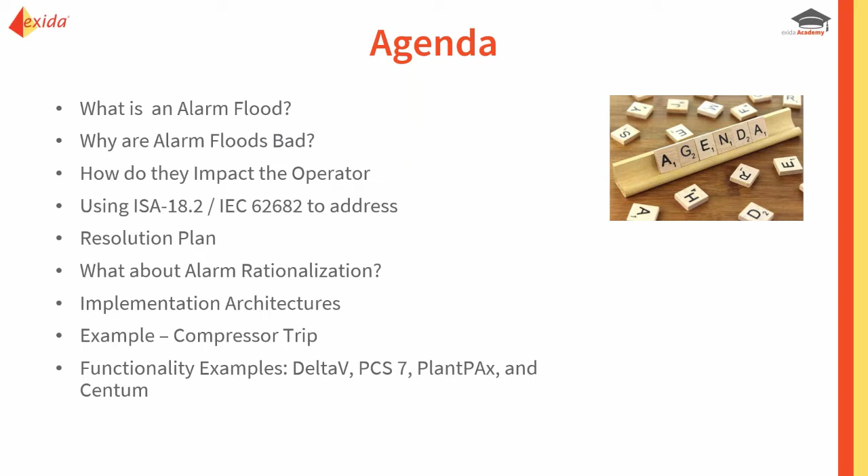In terms of the agenda, we're going to look at alarm floods. What is an alarm flood, and what does it mean when it happens? What does it do to the operator, how does it impact the operator, what can happen? We'll also look at how you recognize floods, how you quantify and measure them, determine what's happened, and figure out how to fix it. We'll look at the information and requirements provided in the various standards and guidelines that exist, and talk about how alarm rationalization figures into minimizing alarm floods. We'll look at different architectures for implementation, whether in the controller itself or on a supervisory computer, and also look at an actual example, a Compressor Trip application, where the compressor trips and you end up with a flood of alarms. We'll look at examples of how that could be implemented within different control systems, including Emerson DeltaV, Siemens PCS 7, Rockwell PlantPAx, and Yokogawa's Centum platform.

So let's start with the definition of what an alarm flood is, or a concept about what it is. A question: is an alarm flood a condition during which the alarm rate is greater than the operator can effectively manage? Is it when the operator gets more than 10 alarms in 10 minutes? Is it a situation usually triggered by a single event, such as a plant upset? Or is it one of the most complex alarm management problems to solve? The answer is all of the above.

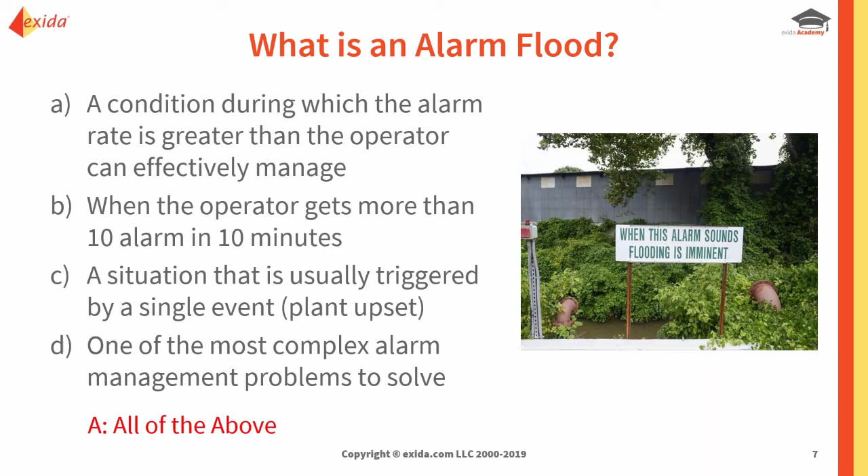According to the ISA 18.2 standard and the EEMUA 191 guideline, an alarm flood is when the operator gets more than 10 alarms in 10 minutes. Now, how do we know when you are actually being the victim of alarm floods and when it's actually happening to your operators? You would notice it because what they'll be doing is furiously acknowledging the alarms or banging on the silence horn button to be able to concentrate and process what's happening. So you end up with a lot of alarms coming in that the operator needs to get through as quickly as possible.

In a lot of cases, operators are just acknowledging the alarm without really understanding what it's for and what it means. Part of the challenge they face is they need to make a quick judgment call about whether the alarm is important, and if it is, what do they do about it? Some of the alarms often are not useful in that case.

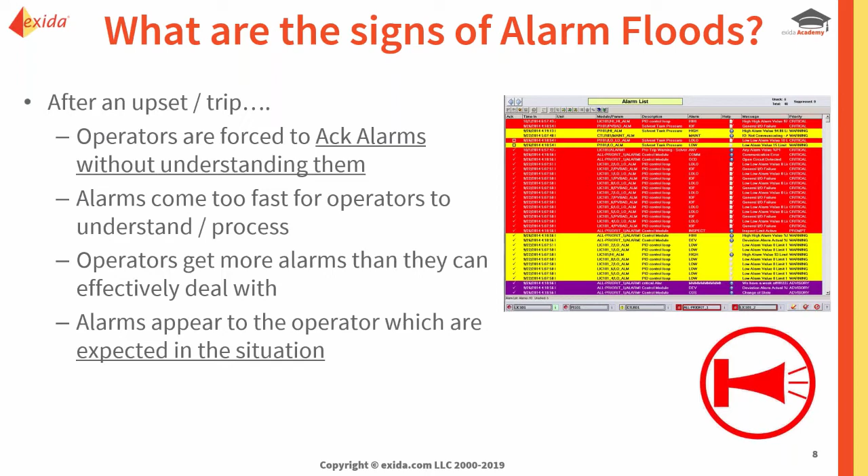After a piece of equipment trips, there are a certain set of alarms that you would expect to get. Those are not very useful at that point in time, but the operator has to sort through all of that stuff and try and make sense of it. That's why alarm floods can be so challenging.

Alarm floods typically occur during the most stressful times: startup, shutdown, initiation of upsets, and that leads to significant additional stress on the operator. It can overwhelm them. The sheer number of alarms can overwhelm them, and the stress caused by that can make it more difficult for the operator to respond effectively.

If we look at this layer protection schematic with different barriers in place to prevent the hazard from escalating, one of the very first ones, in yellow, is the alarm and operator response to the alarm. Well, we need that to work. We're counting on that to work with a pretty high reliability for safety purposes.

For a typical alarm that one might take credit for in a basic process control system, we would assume a risk reduction level of 10, which means a probability of success of 90%, or a probability of failure of 10%. That's the case for a nominal alarm that we're taking credit for.

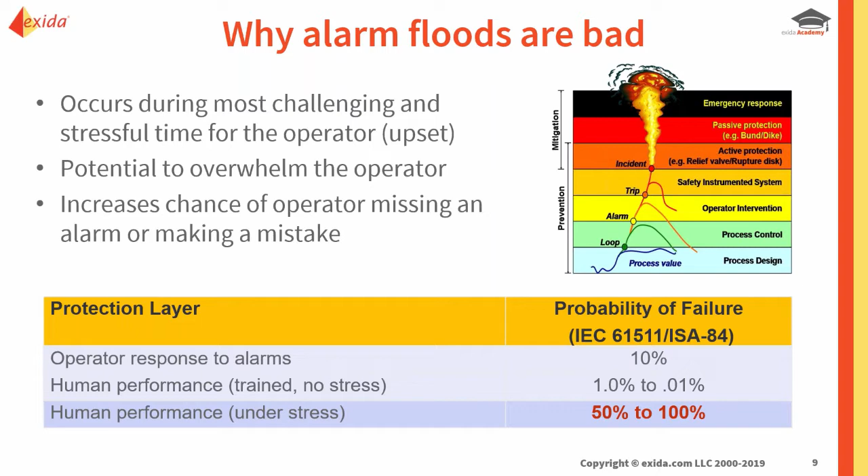But look at this table here, how the operator's performance, meaning how likely they are to fail, changes when they are put under stress. They go from a less than 1% probability of failure to potentially 50 to 100% probability of failure. That would mean this alarm, this layer of protection we're counting on to prevent escalation of the hazard, is very likely to fail if the operator is being flooded by alarms. That's one of the serious ramifications of alarm floods.

This was emphasized in an incident that occurred in 1994 in the UK at the Milford Haven Refinery. The refinery was hit by lightning during the summer, and that started some fires within the equipment of the plant. They shut down most of the operating units, but kept the cat cracker running.

As they were trying to keep it up and running, some of the vessels overflowed. Relief valves went off multiple times, relieving to a knockout drum that became more full of liquid than it was designed for, and that resulted in a rupture of an elbow and a discharge of hydrocarbons that then exploded and caused more fires. When they investigated to find out what happened, there were multiple problems, including poor HMI design and some issues with that.

One of the things they found was there was actually an alarm that said high level in the knockout drum. So the alarm was presented to the operator to tell them something was critically wrong and needed their response. The problem was it was one alarm in 275 coming in a period of 11 minutes. That's like a new alarm every 2 to 3 seconds.

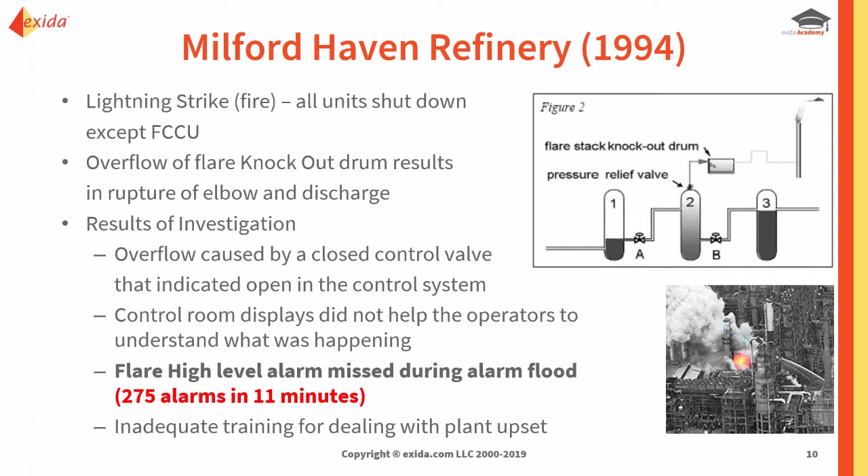If you can just imagine that, put yourself in the shoes of the operator, you can see why that was so challenging. So the HSE in the UK did a very thorough investigation. There were reports published with lessons learned.

Specific research was then gone into collecting best practices for alarm management, which we'll talk about in a second. But some key takeaways from their investigation: alarms should be limited in number to that which an operator can effectively manage or monitor.

We can't just overload the operator with alarms during a flood and expect them to be able to respond correctly. Second, safety critical alarms, like the high level in that knockout drum, need to be distinguishable from other operational alarms. What happened in the Milford Haven incident was alarms were all set to the same priority. Every one of those 275 alarms had the same priority, so it was very difficult for the operator to notice that critical knockout drum high level because it didn't stand out from the other alarms.

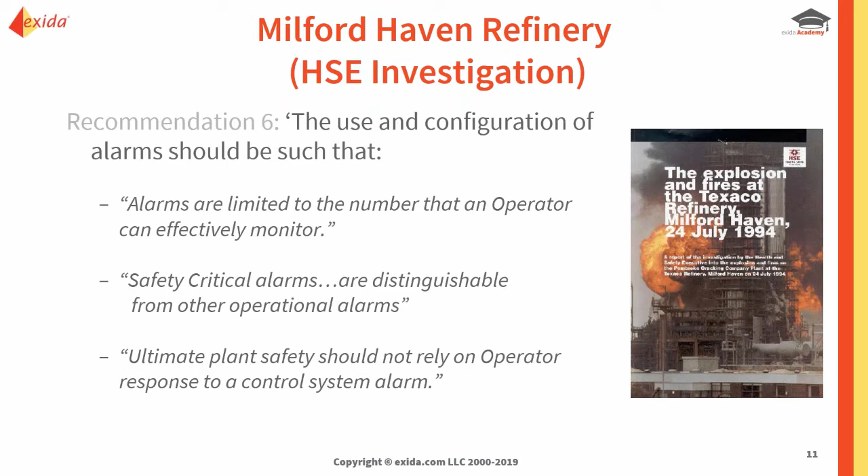So those are key takeaways from that incident that we carry forward in alarm management practices. As a result, the UK launched research and codifying of best practices, and that came into publication with the release of the EEMUA 191 guideline, which first came out in 1999.

It was a collection of best practices for alarm management, and it was the best body of knowledge related to alarm management until the ISA 18.2 standard came out in 2009. That's a true standard with requirements and recommendations related to what owners, end users, and integrators need to do. Now that was updated in 2016, and it was actually used as the basis to create an international standard.

IEC 62682. So those standards now exist to drive alarm management practices. For ISA 18.2, after the standard first came out in 2009, the committee turned their focus to creating technical reports, which went into more detail about how to implement the requirements in the standard. There's one technical report in particular I wanted to highlight: technical report number 4, on advanced alarming. It covers some of the suppression and alarm flood scenarios that we're going to talk about today.

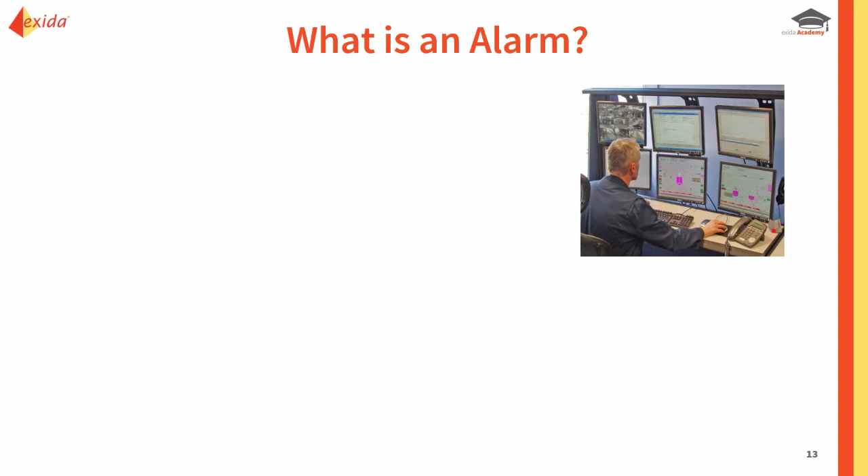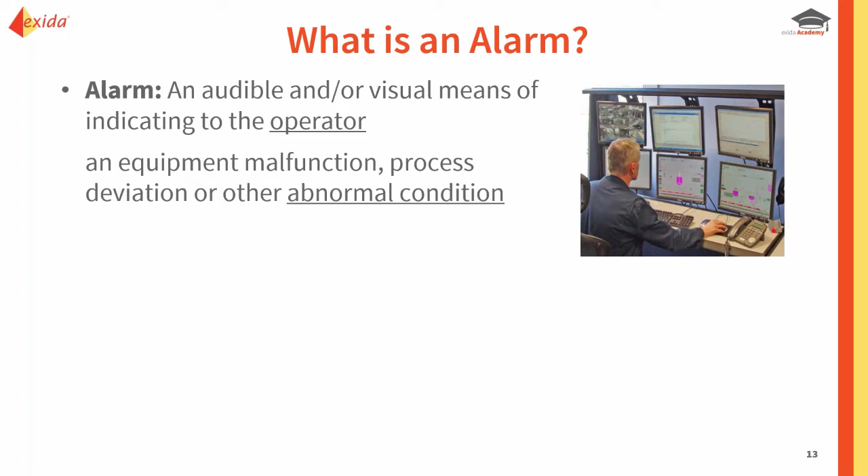First, let's back up to some basics of what an alarm is, according to the definition in those standards. An alarm is supposed to be an audible and/or visual means of indicating to the operator - and I underline the word operator because they are the target audience of the system - if the information is not understandable and actionable by the operator, then it doesn't belong in the alarm system. Second, the alarm needs to indicate an equipment malfunction, process deviation, or abnormal condition, meaning something is wrong, something unexpected has happened. Last but not least, it requires a timely response other than acknowledging the alarm - we're talking about opening a valve, turning on a backup pump. So this is the criteria for what makes a valid alarm.

The process of alarm rationalization then is reviewing the alarms that exist in your current system, or the alarms you are proposing to put in, and making sure that they meet this definition of an alarm. This is important because we're going to talk about whether rationalization occurs before we think about doing suppression, or whether it occurs at the same time. And you'll see what the recommendation is.

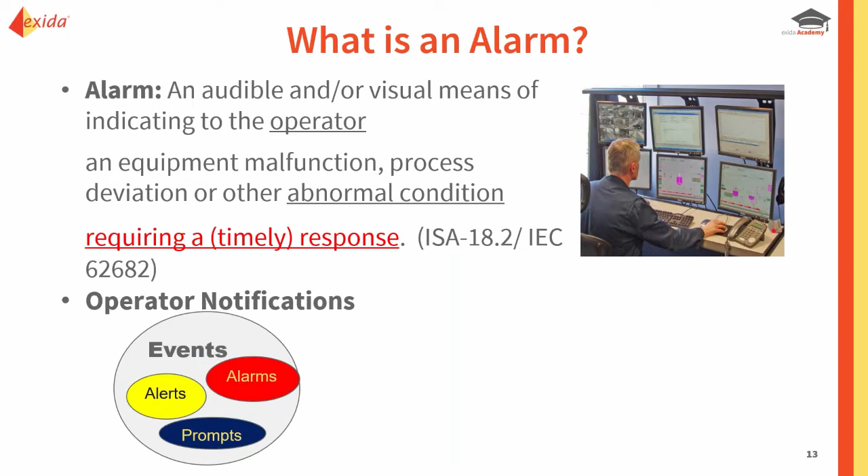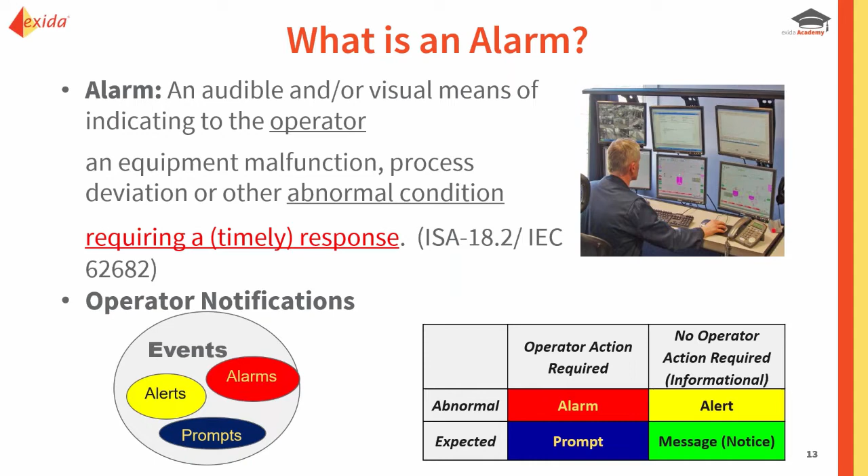Now, one of the reasons why folks have alarm overloads during steady state operations is because they are using the alarm system to notify the operator of everything, even if it's not truly an alarm. So part of the way to clean up the alarm system via rationalization is to eliminate those points that don't meet the definition of an alarm, and to recategorize some of them as this alternate form of notification that they might truly be, and then get that out of the alarm summary display.

Some of the other key design principles we will leverage: making sure that every alarm presented to the operator is useful, relevant, and unique. So we're going to talk about doing alarm rationalization first to eliminate nuisance alarms, get rid of alarms that don't belong. Then, part of what happens during alarm floods is you get alarms that are useful unto themselves, that do serve a purpose, but when that particular event occurs, the alarm is no longer useful or relevant to the operator. So rather than present it to them, rather than give them misleading or useless information, we want to come up with a better way - present them only the information they need to know.

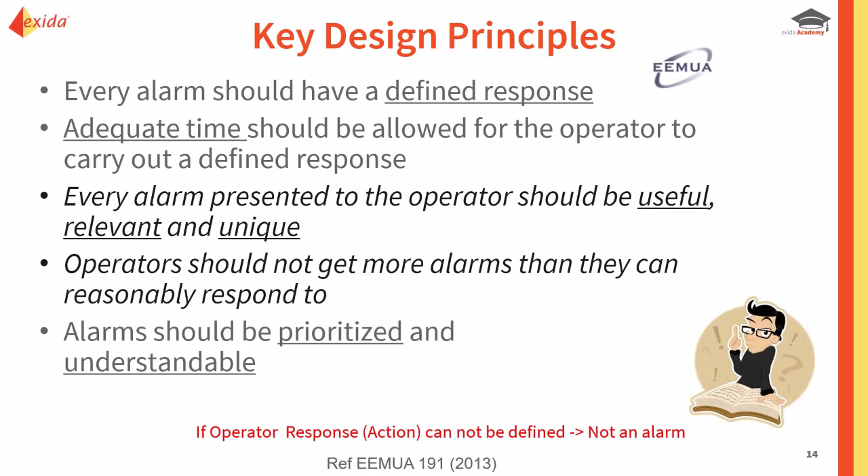And then, of course, we also need to design the system so operators are not getting more alarms than they can respond to. That may mean some of the alarms are hidden from the operators - those they don't need to know about or don't need to see - and we only present to them those that make a difference at that point in time, those that help them understand what has happened and what they need to do. That's essentially what we will look to do.

So to help understand the impact of alarm floods, let's look at the response model for operators responding to an alarm. The first step is they need to detect that the alarm is present. This can be very challenging if you have a lot of nuisance alarms, if your HMI screen has a lot of flashy colors, and you're in the middle of an alarm flood. As we heard with the Milford Haven situation, you have alarms just scrolling by on your alarm summary display. It's pretty hard to pick one out as it continues to move by and try to understand and figure out what's going on. So alarm floods can impact the operator's ability to even detect that a particular alarm is there.

But once they do that, then they need to be able to diagnose what the problem is and take the appropriate corrective action. Now, if the operator is getting alarm floods, that will make it difficult for them to detect the alarm, or it will delay their actual detection and processing of it.

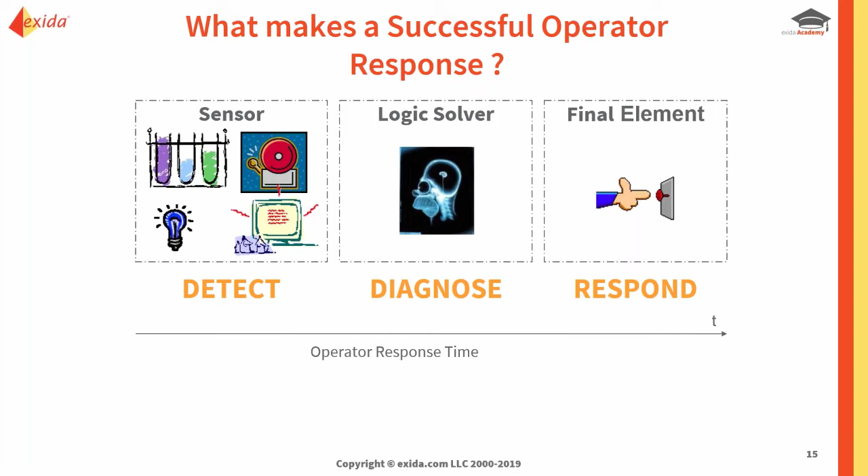We talked about how some of the alarms are probably not useful. During the diagnose step, the operator is forced to go through all of those alarms and figure out which ones are relevant to them at that point in time, and then take the correct response. Under stress, that's a difficult proposition, and it's very likely to lead to mistakes, showing itself as operators either not responding in time or not responding correctly. But what really initiated the incorrect response was the alarm floods making it difficult to detect or diagnose and understand what the situation really is.

So it impacts their situation awareness and damages it, hurts it. This also shows a way to think about how many alarms operators can respond to in steady state. That recommendation and that KPI in the standards is 1 to 2 alarms per 10 minutes. When we get up to 10 alarms in 10 minutes, that's when we call it an alarm flood.

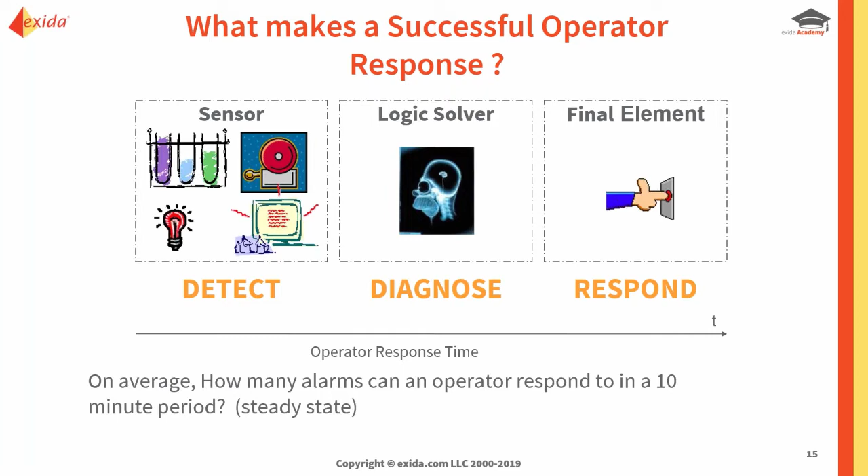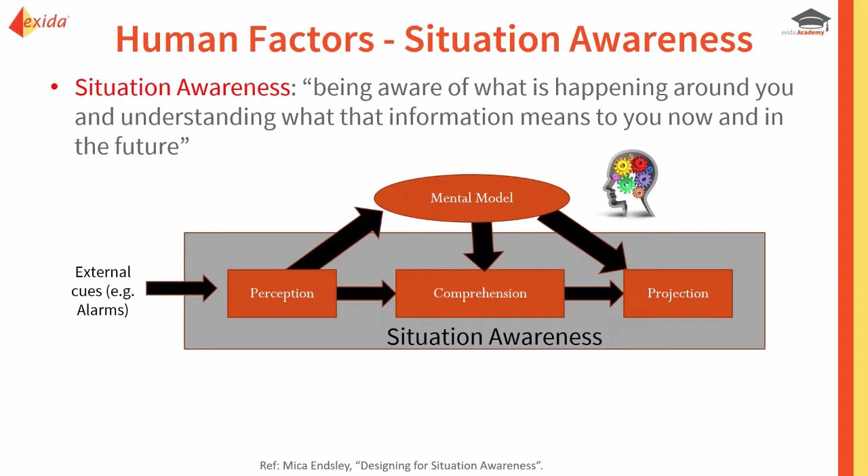But as I mentioned, if you're getting alarm floods, that's going to impact and hurt the operator's situation awareness, because they don't know necessarily which alarms to trust. They need to think about whether the alarm is relevant and meaningful at the time. If they focus on the wrong alarms as being meaningful, it could lead them to misdiagnose and have a faulty mental model, so that their projection of what is happening and what they need to do would be incorrect. So alarm floods can significantly impact the operator's situation awareness and understanding of what is happening in the process.

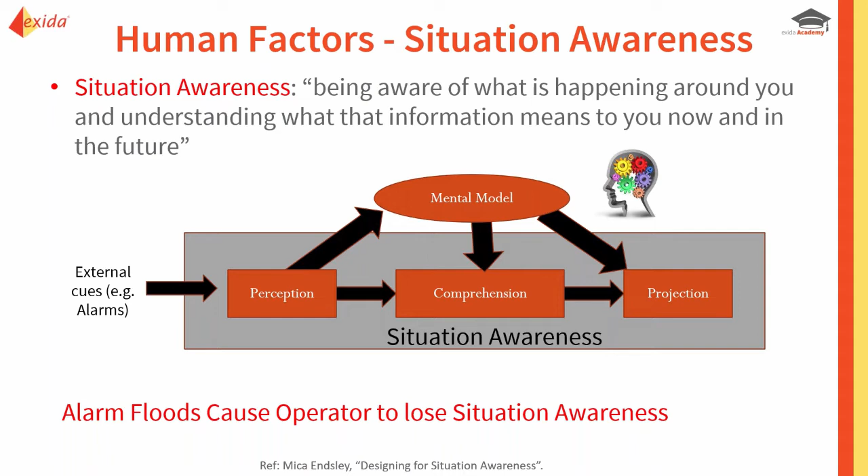So turning again to the ISA 18.2 standard and the IEC standard, we see that there are some metrics provided, some recommended performance levels to evaluate yourself against. The recommended steady state alarm rate, as I mentioned, is 1 to 2 alarms per 10 minutes. For alarm floods, we call that any time the operator gets more than 10 alarms in 10 minutes.

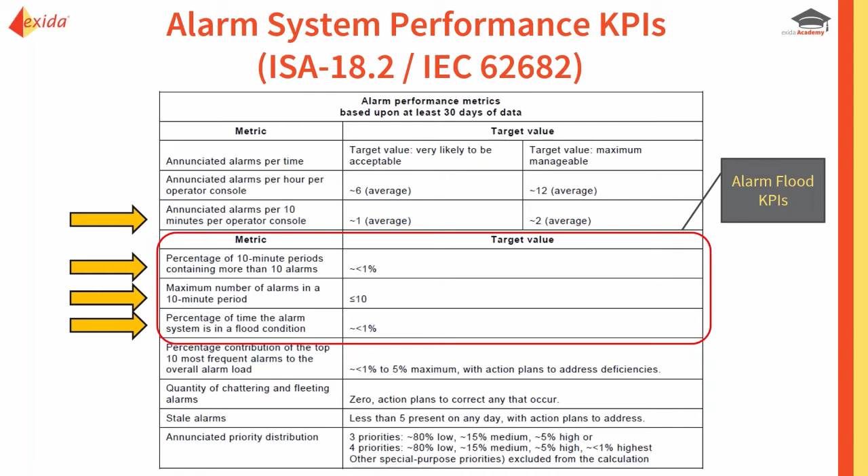It's very likely going to be impossible to prevent that from occurring. So what we want to do is minimize the intensity of floods and minimize the duration of floods. If we look at the duration of alarm floods, we want to try and keep that below 1% of the time. From an operational point of view, that's about 8 hours in a month. So that's one way that we want to benchmark ourselves.

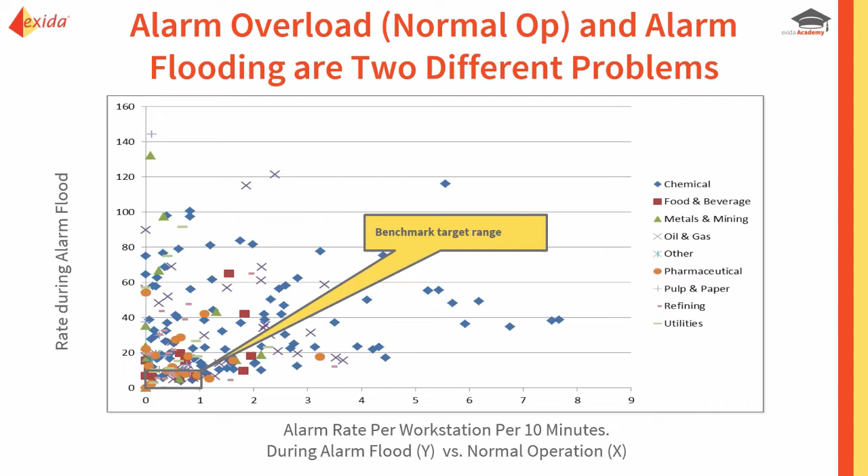So the takeaway is that the elimination of nuisance alarms and reduction of steady state alarm overload is a different problem, different dynamics than elimination of alarm floods. They are relatively independent problems.

And what we're going to talk about in terms of how to solve the alarm flood problem is a technique called suppression. There are 3 different types of suppression defined in the standards.

The first is called designed suppression. That's what we're going to focus on in this webinar. And that is essentially smart alarming to create logic within the control system that detects the changes in states and values of the process and automatically suppresses the alarms that should be suppressed at that point in time, those that are not relevant to the operator.

So that's called designed suppression. There's also a form called alarm shelving, which is a temporary suppression by the operator, like for nuisance and chattering alarms. And the third type of suppression is called out of service, which is an indefinite suppression, typically to allow maintenance to be performed on the hardware and the alarms.

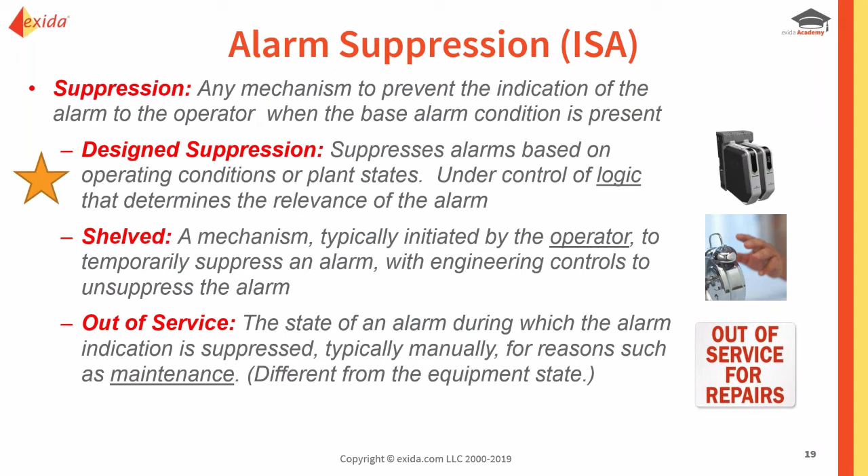Now, just to shout out to the last webinar that we did, which was on alarm shelving. So if you're interested in that topic and have not seen that, I encourage you to go to our website and check it out, as well as we published an ebook about alarm shelving, which documents a lot about the theory, what it's for, what are the requirements of what you need to provide. It also does an overview of how alarm shelving is implemented in several control systems, similar to what we're going to talk about today, only we're looking at design suppression.

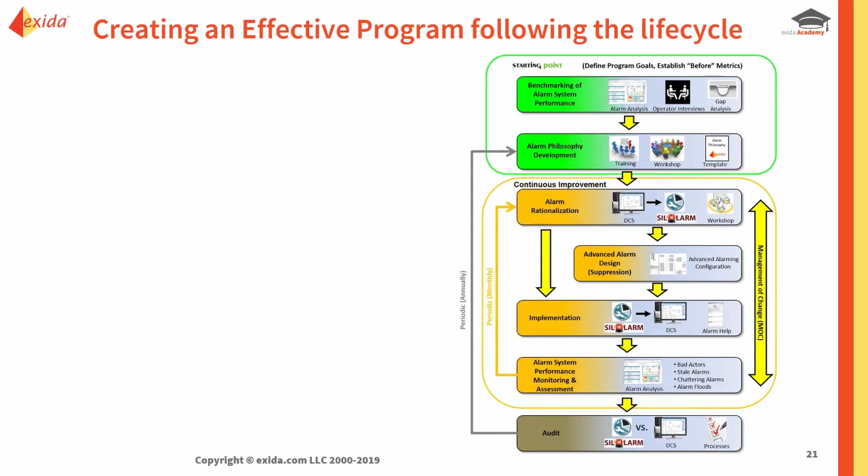Now, if we were to implement an alarm management program, we would have our alarm philosophy done, and then we would do alarm rationalization. And you should do alarm rationalization thoroughly first before you jump into doing alarm suppression. You can see how that's represented here. It is very possible, although not probable, that your rationalization would be good enough and successful enough to eliminate the need to do alarm flood suppression.

But assuming that that's not the case, what probably needs to happen in terms of a timing process is that you do a thorough rationalization of the system, you implement those results, and then you measure and watch your performance. And then based on what you see, that's when you decide or make the decision about whether you need to implement alarm flood suppression. And part of the benefit of doing rationalization first is it reduces the number of alarms that you need to think about in terms of suppression.

If you do suppression or think about designing suppression at the same time as rationalization, you're worrying about a lot of alarms that you don't know whether they're truly alarms or not yet because you haven't completed the rationalization process. So that's one of the reasons why, in my personal opinion, it makes sense to focus on doing a thorough rationalization first and then coming back and doing alarm flood suppression separately as a follow-on activity, not doing them together.

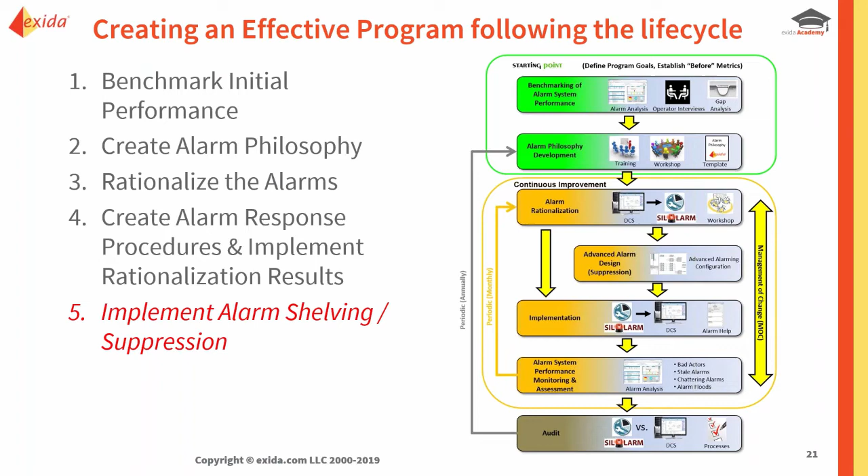So now let's look at how we would actually resolve alarm floods or fix them. What could we do? How could we implement something? And we'll look at an example of a DeltaV control system.

As I mentioned, the first step really should be to perform and complete alarm rationalization so that you've eliminated your nuisance alarms and you're down to the smallest number of alarms that you need. Then you can measure alarm performance and identify which alarms are being initiated during floods, potentially what is the cause of it. And in a DeltaV system, you could perform those roles with the DeltaV Analyze software or the Mosaic tool.

And then once that's done, you've identified some of the alarms that potentially need to be suppressed. Now you can design how you want the suppression to work. You can design that within the SILAlarm alarm rationalization tool. So it's already got record of the alarms that you've rationalized, what the priorities are. And now you can take it further and say, okay, we want to define an alarm flood suppression group, and then we want to implement that within the control system. So there's a way to export and import it so that it automatically creates the control logic for the alarm flood suppression running in the DeltaV controllers, along with the control modules that it needs to suppress.

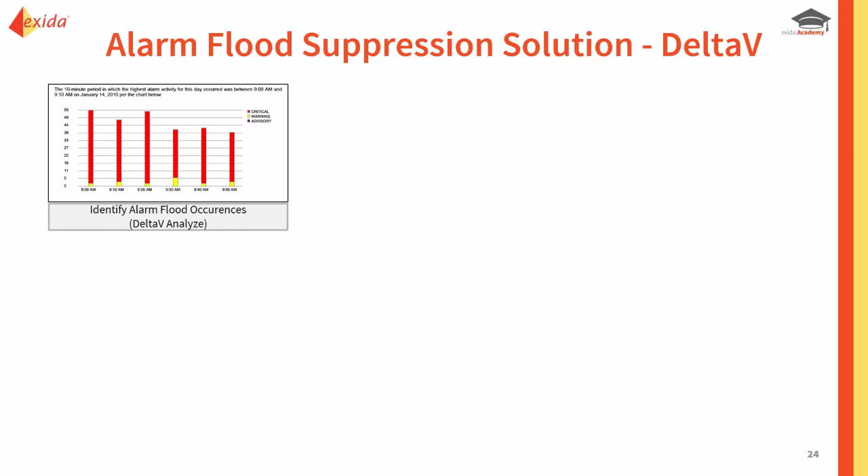So looking at the pieces of that solution, DeltaV Analyze will help you identify alarm floods and look at which alarms occurred to kind of create patterns and understanding. Mosaic also helps you understand what's happening, what's triggering alarm floods, gives you a different presentation way to look at alarm floods.

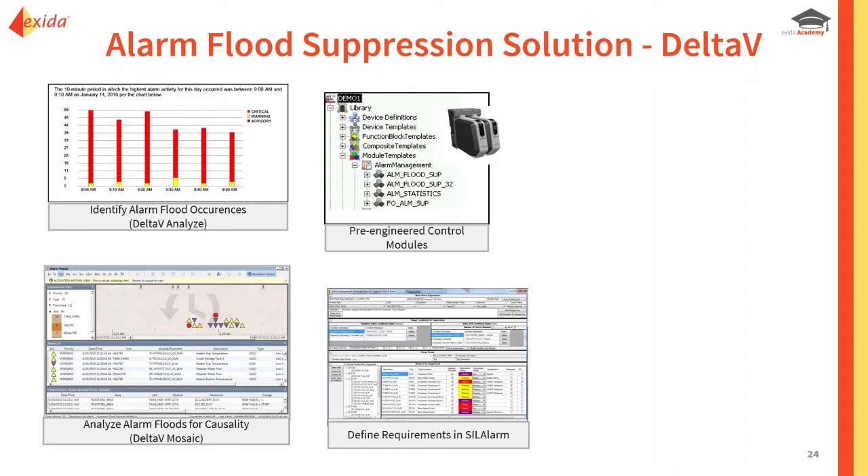We'll talk about using some predefined control modules in the Emerson DeltaV library, in this case for alarm flood suppression, that were created in conjunction or by partnering between exida and Emerson, which allows you to define or essentially configure them through the SILAlarm tool in a group, and then push that information into DeltaV using the bulk edit tool to enable that logic to run inside the controller.

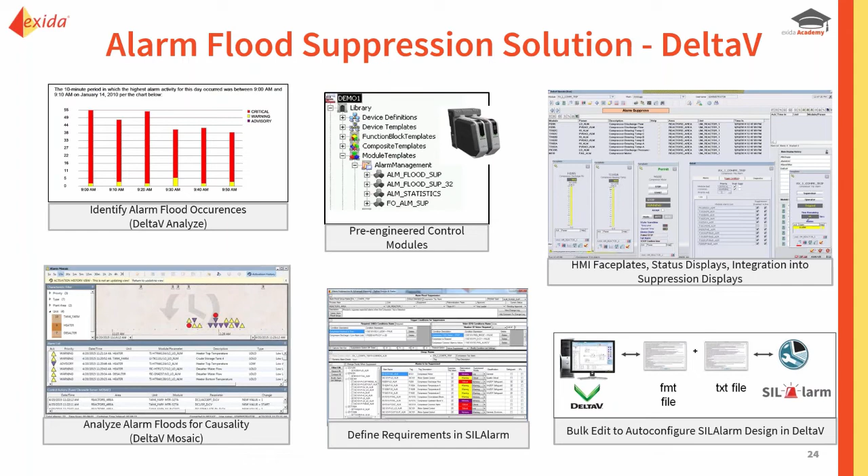And then those link to faceplates, pre-configured faceplates, that display the information about which alarms are going to be suppressed or which are suppressed and the initiating conditions.

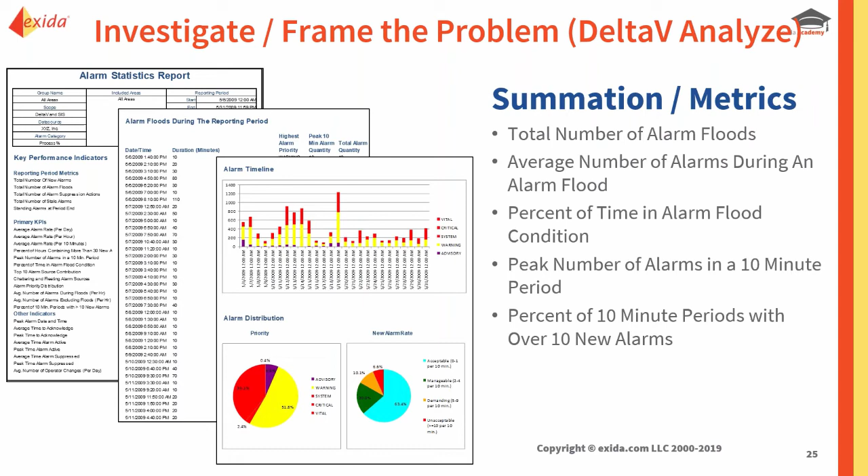So to frame the problem, we need some tools to help us measure and understand what's happening. DeltaV Analyze can do that, showing us the alarms that are part of a particular flood, how long the floods last for, and we want to do significant analysis so that we can understand the characteristics of the flood.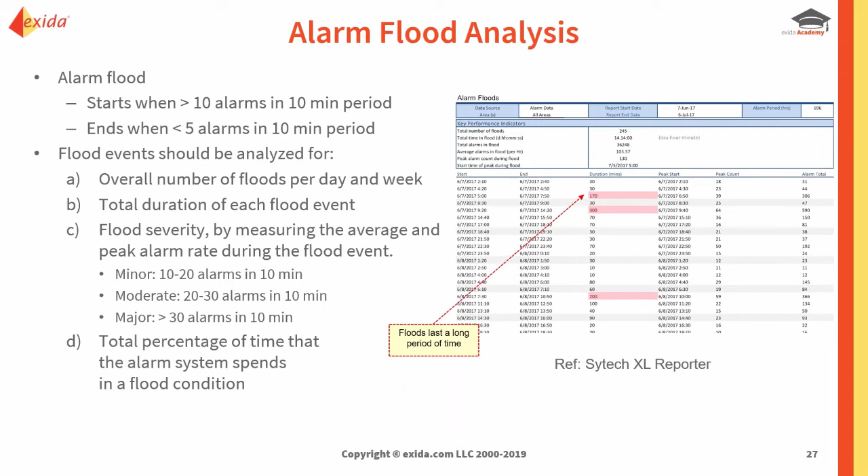How long does it last for? What's the peak number of alarms? Those kind of things. So if we need to pick a scenario for us to attack, we can use this kind of a performance measurement to help us figure out what should be fixed first.

Again, the Mosaic tool, as I mentioned, is a different way to present alarms, either historically or as they're occurring. What you'll find is in the midst of an alarm flood, oftentimes the standard traditional alarm summary display is not very helpful. If what the operator is seeing is new alarms scrolling by one every couple of seconds, then that's not a very useful, helpful interface.

Mosaic provides the alarm information in a different way. You can see the alarms are stacked here, showing which alarms occurred when. These are 10-second slices, so you can get a better feeling for the sequencing between them.

It also shows cross-reference to operator actions that were taken at the time. So in terms of defining and understanding causality and what actions were taken, it's a really good tool for doing that.

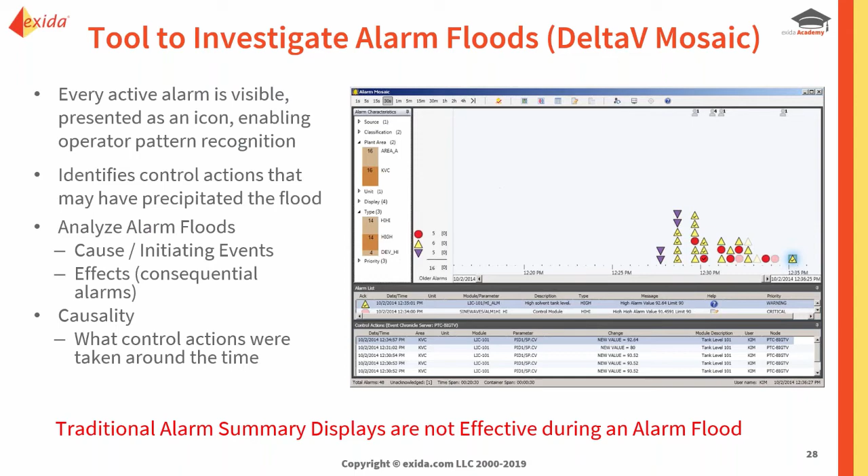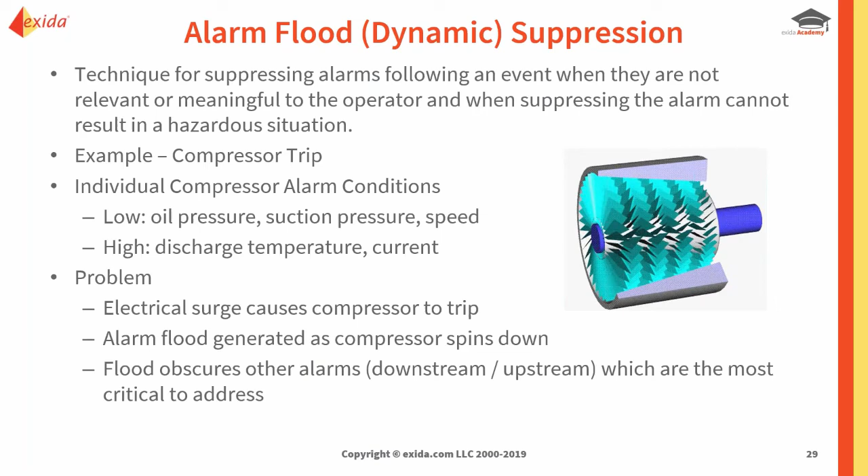So now let's apply that to a common scenario of a compressor that trips unexpectedly. And as it is spinning down, it creates a whole bunch of alarms that are expected and are not useful, and actually get in the way of helping the operator to figure out what's happened and get the system back up and running. So we want to figure out how to deal with that.

We'll divide that into two main steps. The first step is the definition of call it a state detection algorithm. So how do we detect when the compressor is tripped? What conditions can we look at?

And we'll look at those conditions and create either conditions that must be met, kind of initiators, if you want to call it that, and then some that you'll look at in terms of a voting scheme, perhaps, where you're looking for 2 of 3 or 2 of 4 conditions to be satisfied. But anyway, when that state is identified and it's time to suppress alarms, we've defined kind of a rule set for defining the alarms that need to be suppressed when that state becomes active.

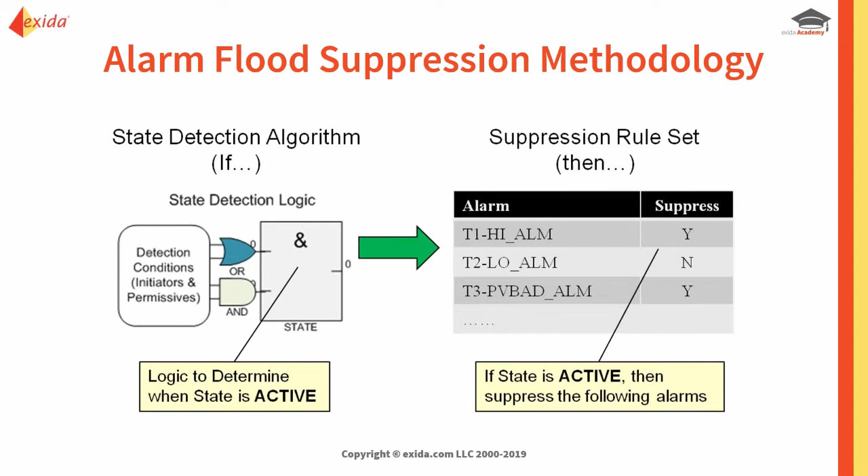So for a compressor, first we define the different states of potential operation, whether it's running or starting or stopping or whatever. Our concern in this case is the tripped state.

So then we turn our attention to how do we know when the compressor has tripped unexpectedly. There are certain process variables and measurements and things we could look at. We could look at the interlock trip status, perhaps, look at the status of the motor that's driving it or the drive, and the speed and whether a low speed alarm has been created.

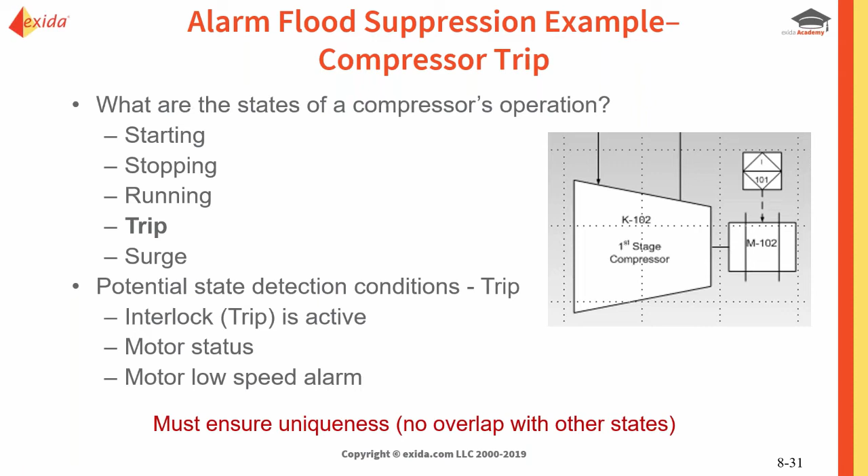So we want to look for what are the process conditions that we can bank on to know when the compressor is tripped.

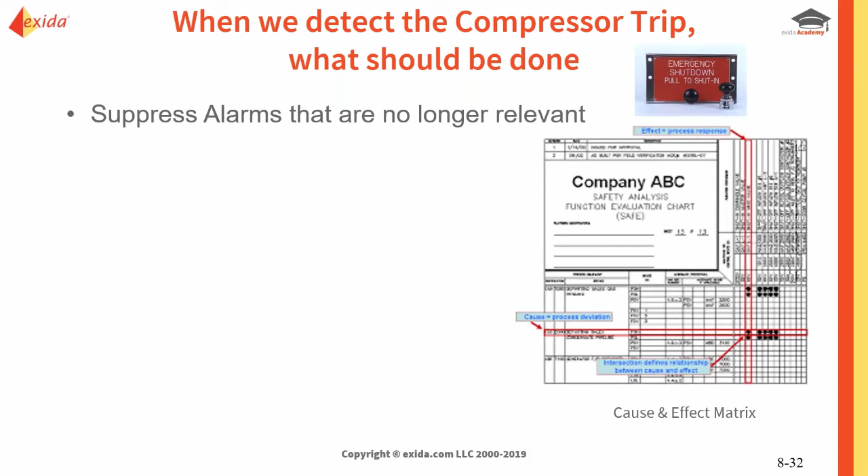And then once we're able to define that, then we want to think about what alarms should be suppressed when we detect that the compressor is tripped.

So this case could be low flow alarms, bearing temperatures, etc., the stuff that you expect to be there because the trip has occurred. And ideally, we want to replace those with a compressor trip alarm instead, or the alarms that are still valid and meaningful and useful to the operator. So there may be some, particularly if it's related to the first out of what actually happened, what actually triggered the trip, that would be useful for the operator to know.

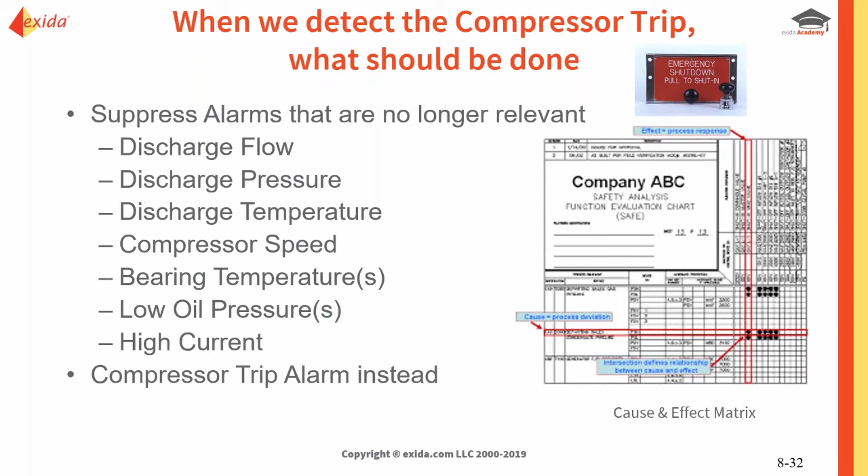Oftentimes you can get an early feeling of what alarms should be included in the suppression group by thinking about the cause and effects that go with the scenario. If it's a predefined trip state where an interlock activates, what are the devices that get moved based on that, and what alarms would be created as a result? You can often identify during a PHA when you're going to have a potential alarm flood scenario in the future because of a trip that's going to occur and the action it takes will cause a lot of alarms. So very early in the process hazard analysis, you can identify not only the potential for an alarm flood to occur during operation, but also what alarms are likely to be generated in that case.

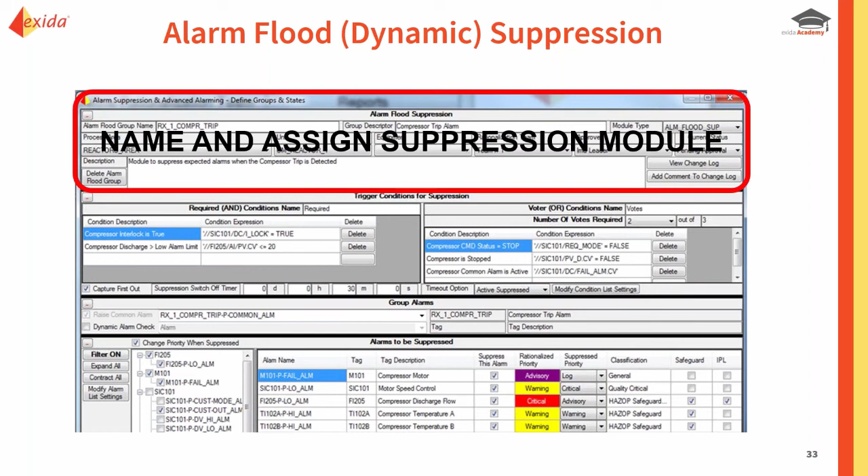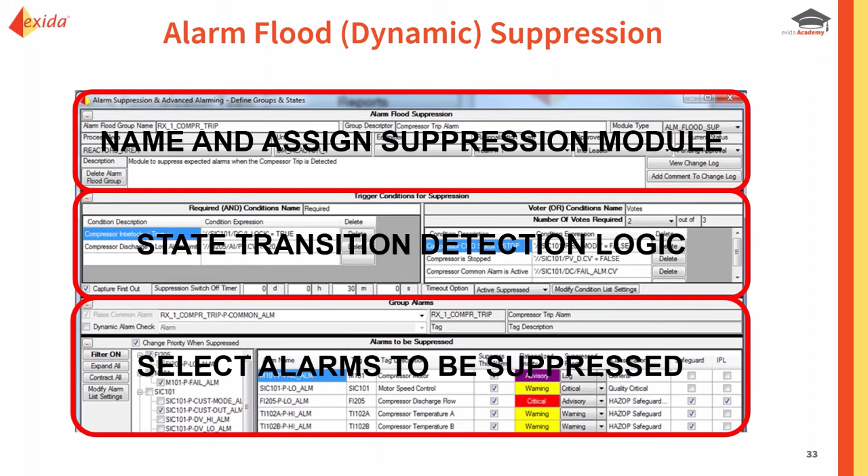Now let's look at how we would evaluate, implement, and define that within the SILAlarm alarm rationalization tool. We've done alarm rationalization already, and there are three main steps within the tool. First, we need to define the alarm flood suppression group. Then we need to define the trigger conditions for the creation of the state detection algorithm. And the last step is to identify what alarms should be suppressed when the flood suppression scheme activates.

So the first step is to identify what the purpose of the suppression group is for. In this case, if we're working with the DeltaV system, we pick which of the pre-configured control modules for alarm flood suppression we'll use, either 16 or 32 alarms it can work with.

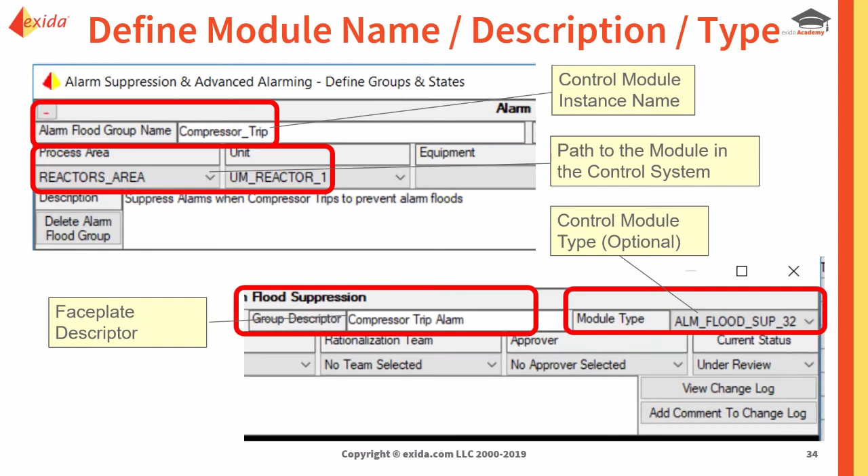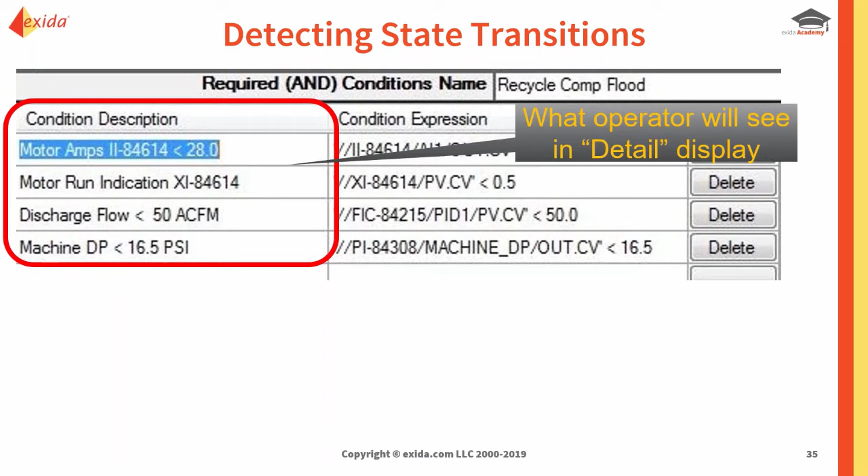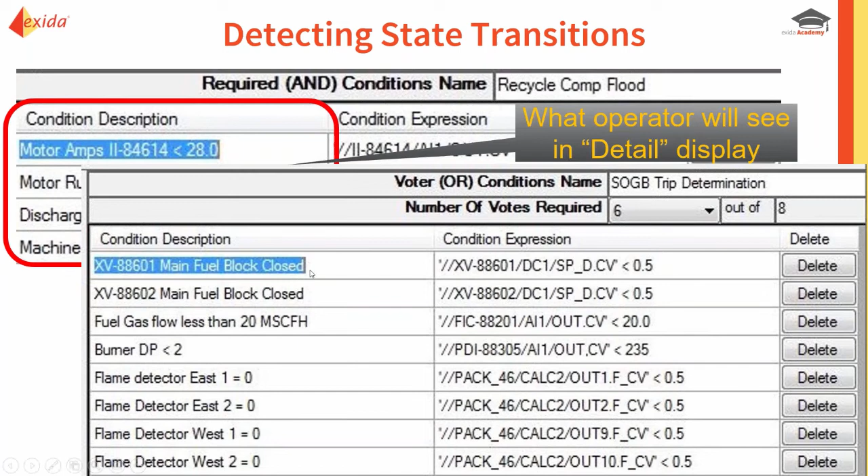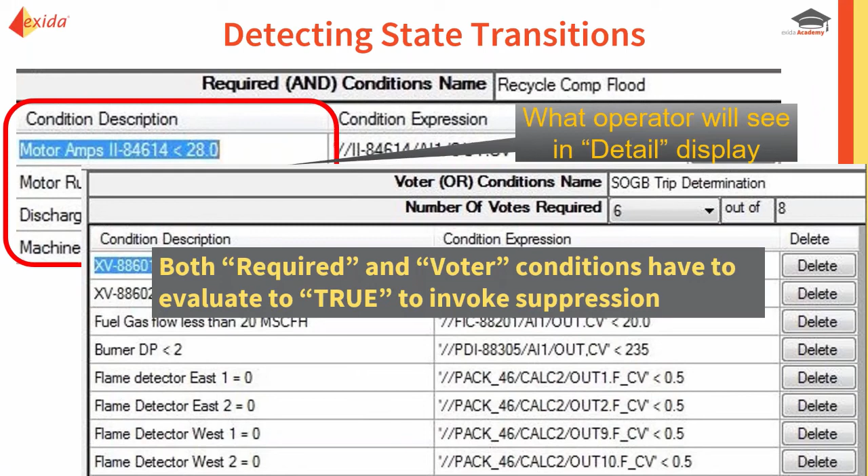Then we want to define the trigger conditions for the state detection algorithm. What process variables should we look at to determine when the compressor is tripped? We're looking at analog values, we could be looking at discrete statuses, and we're defining it in two different ways: not just the English description of what's happening, but also the actual logical description that will go into the control system, in this case DeltaV, so it can logically determine whether something is happening. These condition descriptions are what would actually be shown in the HMI to the operator, so they would see those as the conditions defined to initiate the suppression, and they would have a status to know which of those conditions has been satisfied.

When it comes to implementing state detection, here are some best practices or tips coming from Technical Report Number 4 from the ISA 18.2 committee.

We would never want to rely on just one single point or measurement, because if it has problems—say it's an analog point cycling around the set point to kick off the suppression—then we would have, not a chattering alarm, but a chattering suppression scenario, which would be really bad. We want high reliability in the suppression scheme to kick off, so we'd want to look at least two different independent pieces of information to determine that the suppression needs to be kicked off. We want to make sure those pieces of information, those sensors and measurements, are not related so they could fail by common cause. If it's an analog point, we may need to implement deadband, but again you want to make sure you're looking at more than one sensor to create confidence and ruggedness and reliability in the algorithm.

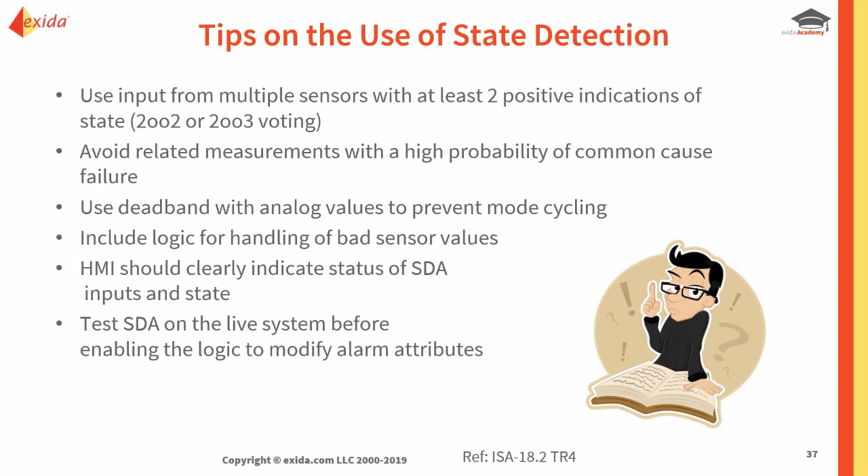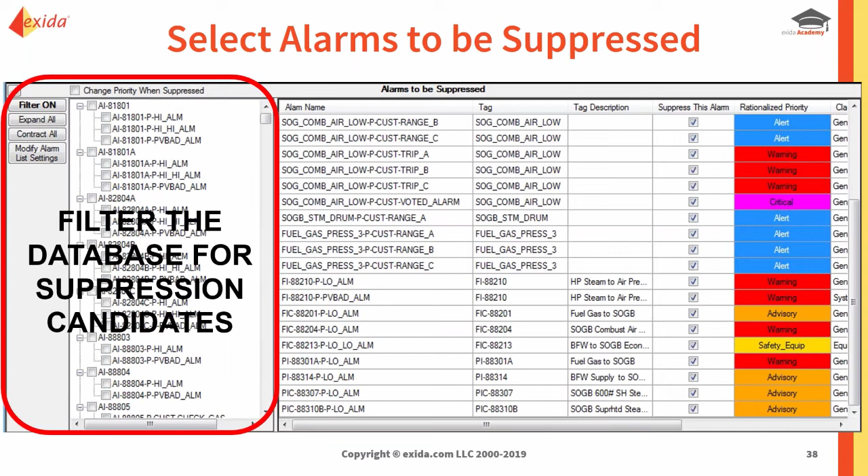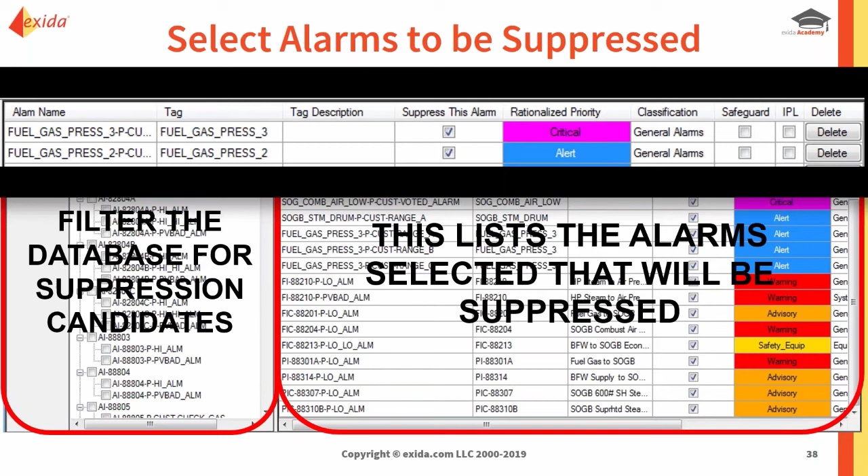Once that's done, then you're ready to select which alarms should be suppressed. In SILAlarm, we can filter to give us the list of alarms relevant to sort through from that particular piece of equipment, and then identify which ones need to be suppressed. If we look in detail at the information there, we have the priority of the alarm, its classification, and information as to whether it's being claimed as a safeguard or an IPL. That all gets documented and discussed during rationalization. That's another reason why I believe rationalization should be performed first, because then you're going to look at these alarms and want to make sure it's okay to suppress them.

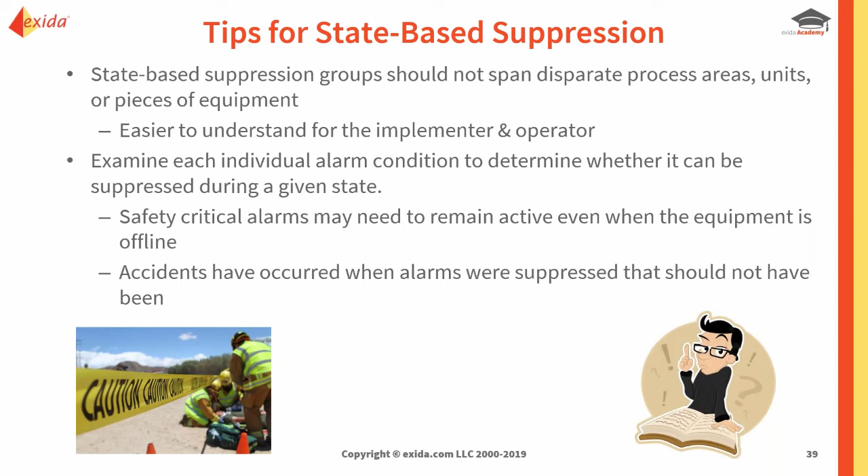If an alarm is the highest priority, or classified as safety critical or safety related, or taken as an independent protection layer, you need to think further about whether it should be suppressed. Just because a piece of equipment is tripped doesn't mean all alarms can be blanket suppressed. There may still be undesirable situations or potential hazards that require the alarms to remain active. So many alarms can be suppressed, but you should go through each one to make sure it is acceptable to suppress.

One downside of automatic suppression is you have no visibility as to whether alarms are actually going off when they should be. Some people take the algorithm a step further and say they want notification if an alarm that's expected to go off while suppressed didn't activate the way it was supposed to, or if the trip did not actually proceed as expected.

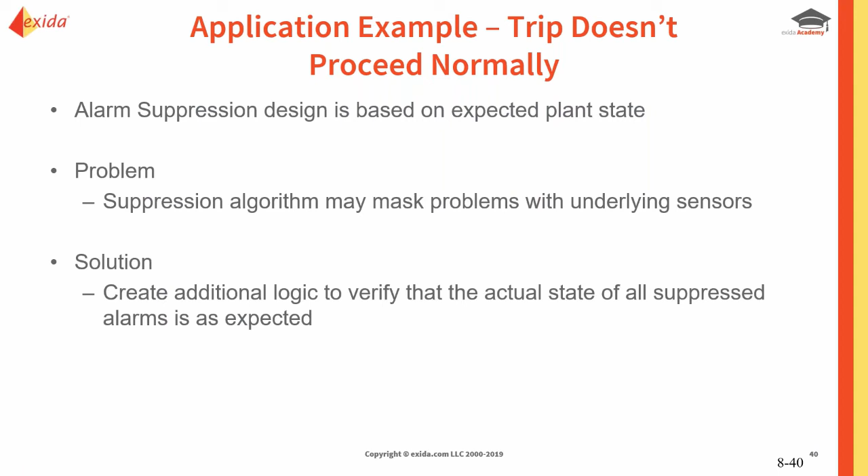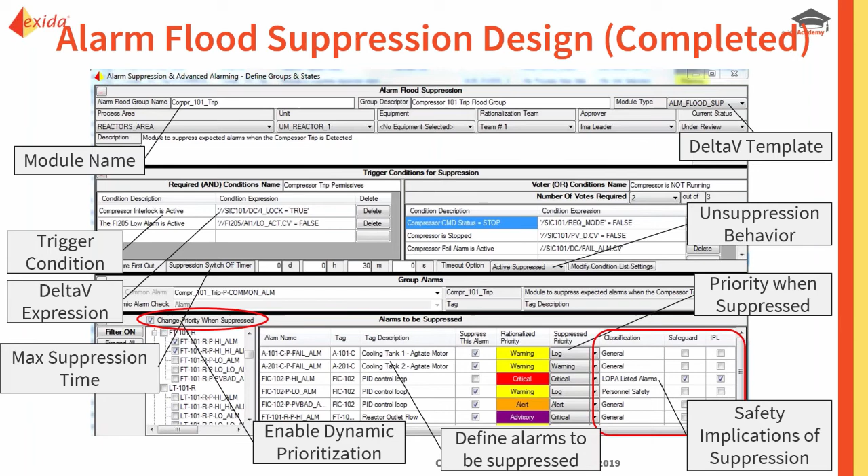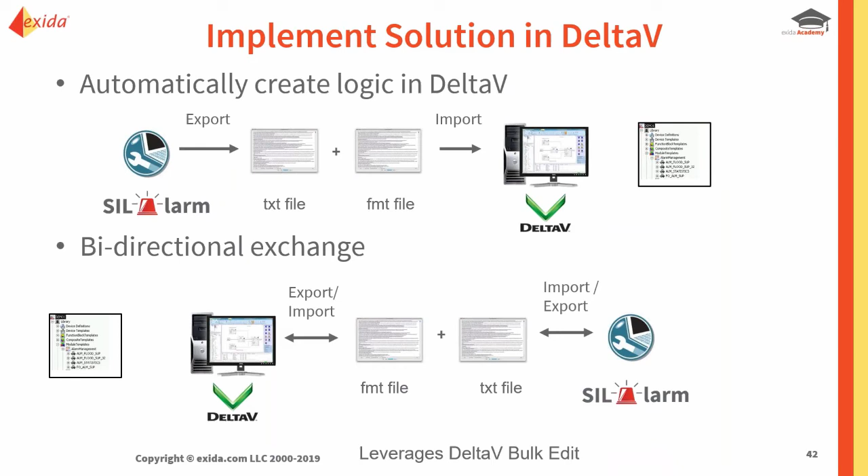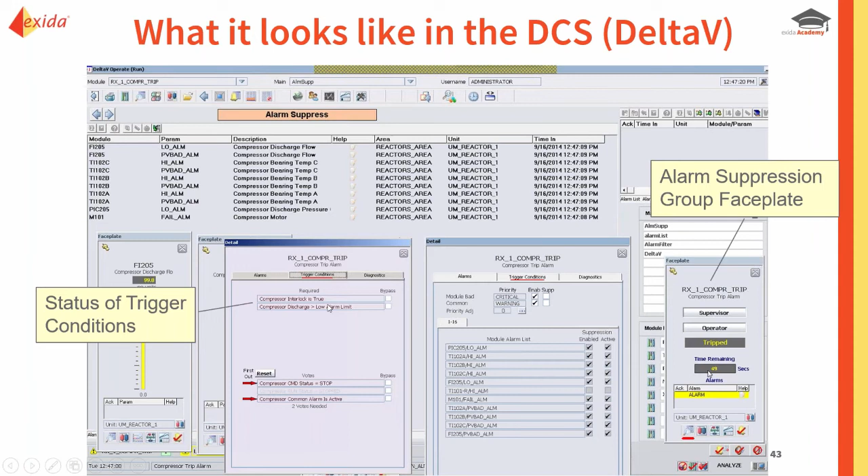When we put it all together and look at the summary of the captured information, this is what we would have in SILAlarm. We then export that from SILAlarm to a text file, which can be directly imported into DeltaV, and it will automatically create the control logic to run in the controller. That comes with faceplates that allow the operator to control whether suppression is active, view the status of the suppression, whether it's kicked on or not, and if it is, which conditions caused it to go active, and if it was a voting scheme, which are the first outs.

One of the things it does automatically is put all those alarms into a suppressed alarm list. That's a mandatory requirement for design suppression - if alarms are being suppressed, we don't want to hide that information. We want to make it available for the operator to see if they need to. Suppressing removes the alarms from the standard active alarm summary display and puts them on a different display, the suppressed alarm list, so the operator can always find out what's going on, see the list of suppressed alarms, and manually unsuppress them if need be.

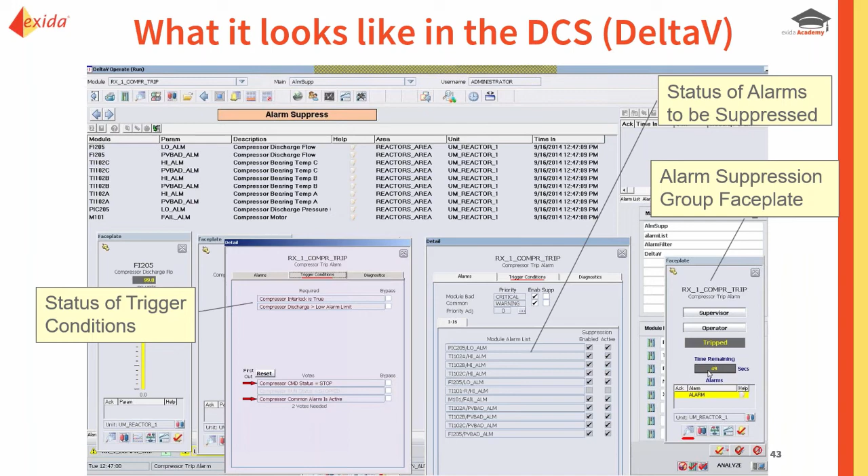There are things you can do with HMI design to help the operator respond to or deal with alarm floods. Certainly the way alarms are listed or ordered on the alarm summary display can make a huge difference. Typically alarms are displayed either in priority order, highest alarm at the top, or in chronological order. Research done by the Center for Operator Performance found that structuring your alarm summary display with the highest priority alarms always at the top allows the operator to deal with more than potentially 10 alarms per 10 minutes - the most effective design.

Experienced operators could actually deal with and process almost 20 to 30 alarms per 10 minutes with this design. So an experienced operator combined with a smart design of your alarm list, with the highest priorities displayed at the top, helps the operator process alarms during a flood. One thought is that this design means delayed responses to lower priority alarms. But if you've done rationalization, that's actually what you want - an active high priority alarm needing attention should always be more important to respond to than a low priority one, since the low priority should have a much less significant consequence.

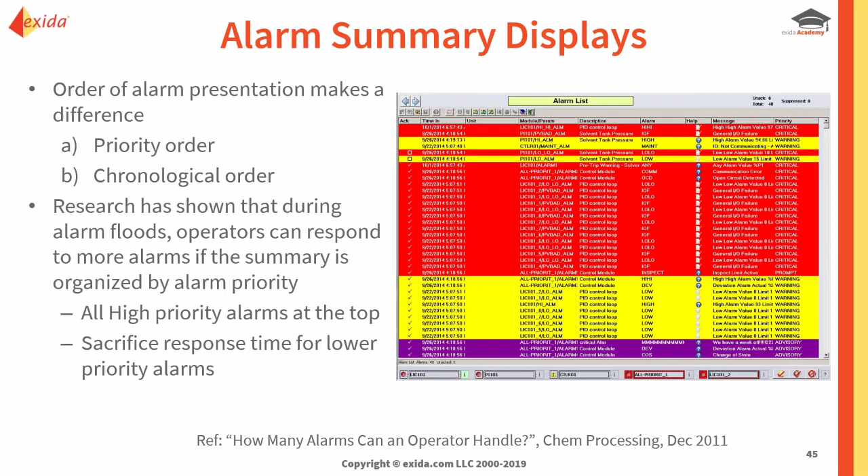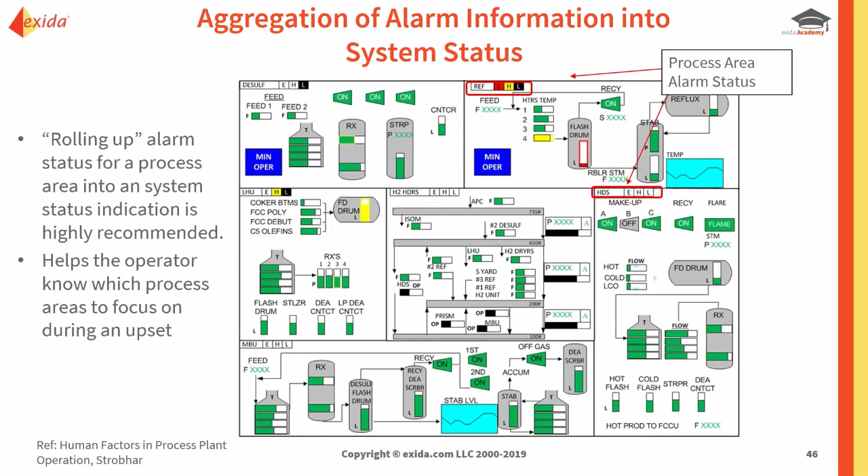Another thing you can do within the HMI design is aggregate or roll up the alarm status for each process area or unit, so that from a situation awareness point of view, the operator can understand which areas are having problems, where the upset or flood is occurring, so they know which areas to focus on and which ones are working fine.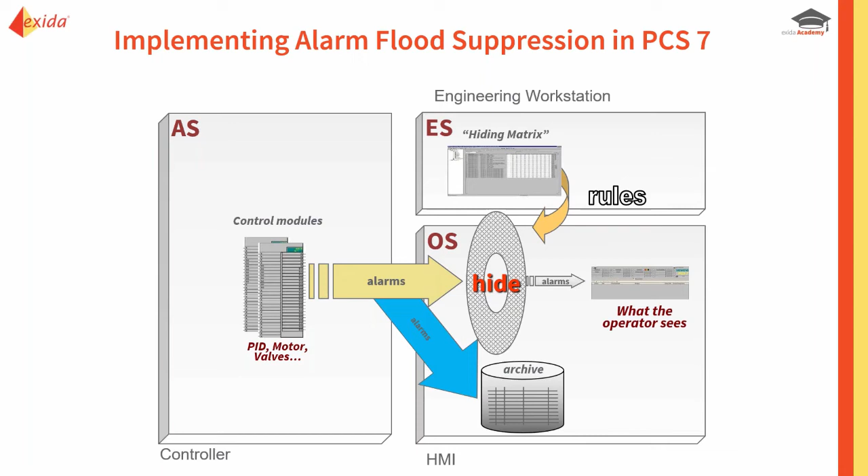The way it works is you define rules within your engineering system to hide alarms depending upon state, and I'll show you how to define that logic. Essentially what occurs is when the alarms are generated, they're all put into the archive, but this hiding matrix that we define in the engineering system controls which alarms actually get through and get presented to the operator. Here's a blow up of how that works in a bit more detail.

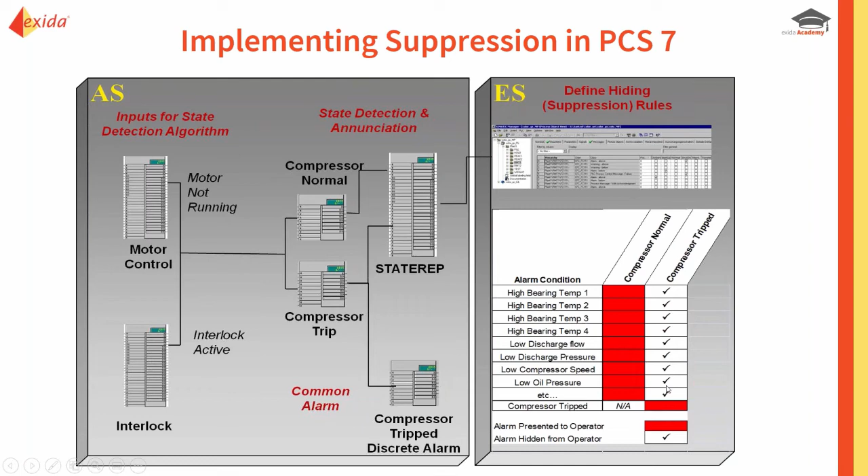In the automation station, we've got our control logic, our CFCs, to indicate whether the compressor has tripped. We have compressor states that get driven into a state rep chart, and that interfaces with our hiding matrix. In the engineering system, we define for each state, a column, whether an individual alarm, a row in this view, should be suppressed or not. So each alarm we're indicating suppressed or not depending upon the state.

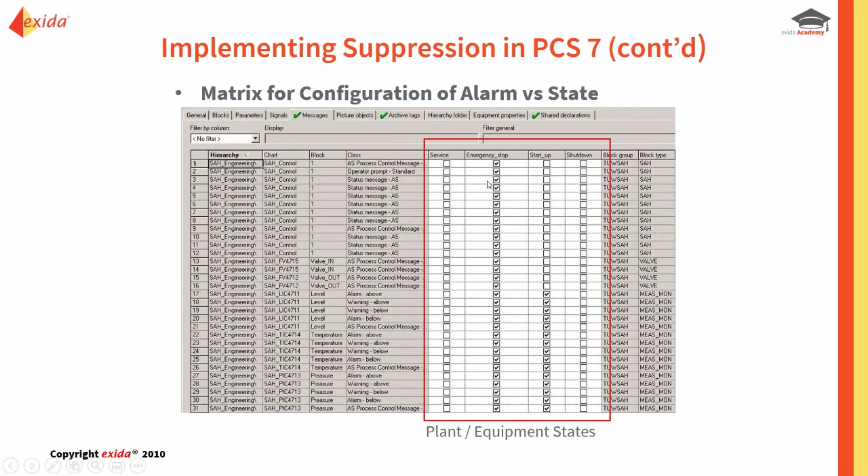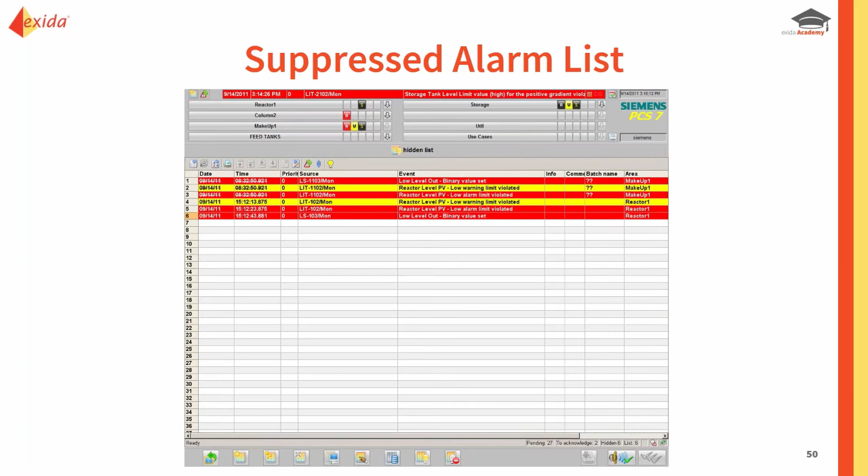Here's a bigger blow up to see what that actually looks like. Each row is a different alarm, each column is a different state as detected, and the checkbox indicates that particular alarm, that particular row, should be suppressed when it's in that state. Those alarms don't appear on the active alarm summary—they go to the suppressed alarm list, or the hidden list, in PCS 7.

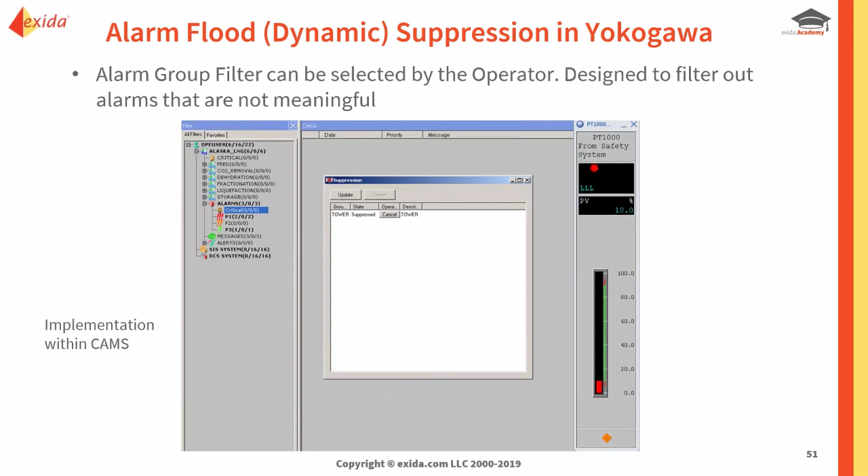Now looking at a Yokogawa system and CAMS, you can define alarm groups in a filter that can be manually activated. So the operator can say, I want to switch to this filter that's predefined to filter out certain alarms, either individual alarms or alarms of a certain priority.

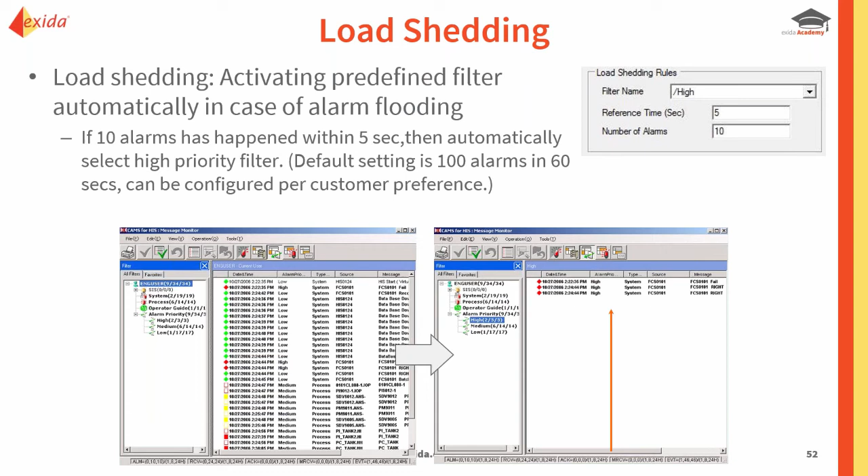They take that a step further with what they call load shedding, which is automatically invoking a filter. So you could define that if the system detects more than 10 alarms in 5 seconds, or some other metric, it automatically filters so the operator only sees the highest priority alarms—similar to what we had just talked about. If you've done a thorough alarm rationalization, that's a valid approach to help the operator deal with the situation, because focusing on the higher priority alarms should be what is best in the upset situation.

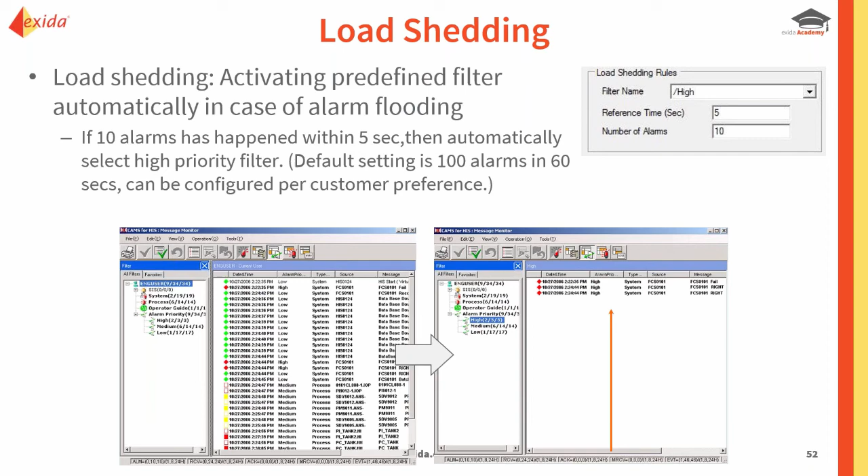If it's a low priority alarm and it's not responded to, either the consequence would be relatively minor, or you're going to end up with a higher escalation alarm, and eventually you get to the higher priority where the operator sees it. So sometimes this type of algorithm can be useful.

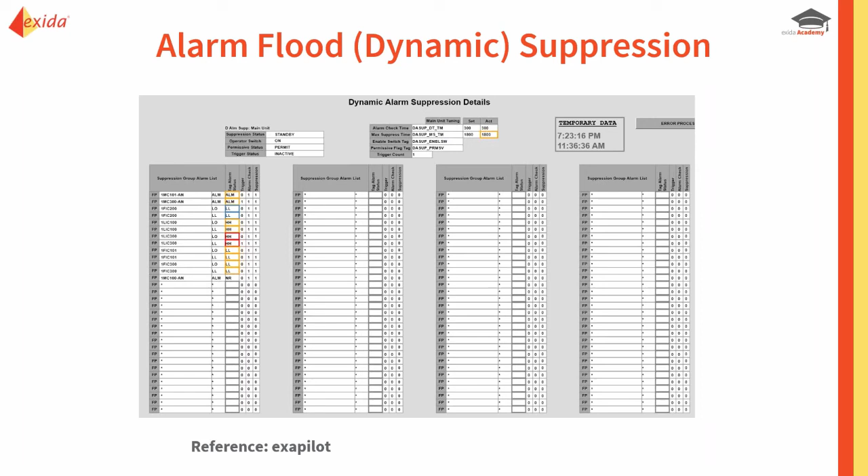In the Yokogawa system, there's also an add-on called Exapilot, which allows you to define and set up the alarm suppression in a way that actually matches up with what we defined in SILAlarm. It's kind of the same algorithm, the same parameters, the same input goes into that as what we saw in the SILAlarm tool.

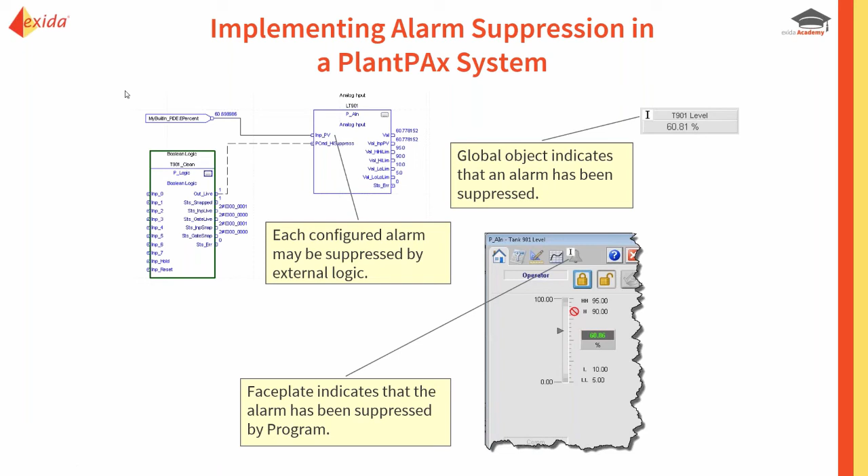Looking at the Rockwell PlantPAx system, each alarm in the control system and the logic has a suppression input bit, a programmed suppression. So you can set up logic based on the state that's detected, the compressor trip, that would suppress the individual alarms when that state is detected. Then the information about whether the alarm is suppressed or not is displayed and shown within the HMI displays, on symbols and on faceplates, as well as put onto the suppressed alarm list.

Now, everything I've been talking about to this point is assuming that we are defining alarm suppression and it's being implemented in the controller, so it runs in the controller alongside the control modules that are generating the alarms. We'll call that the embedded approach.

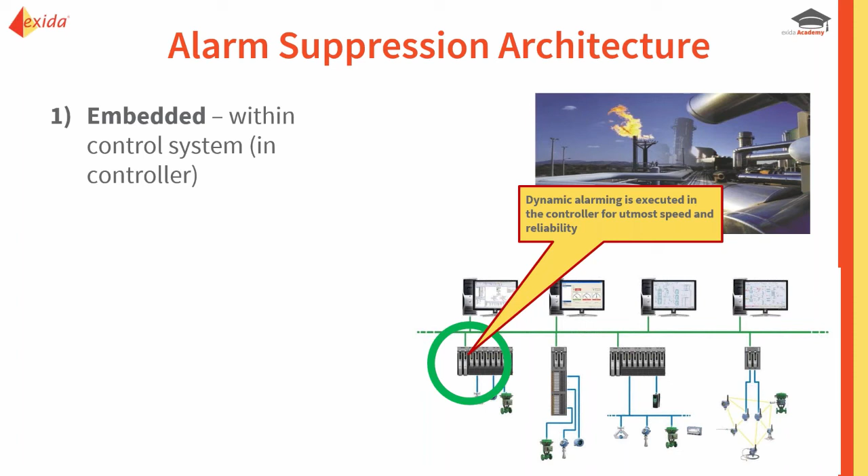There is another approach that used to be used more frequently, which we'll call the supervisory approach, where sometimes even third-party software is connected to the system, and that's where the alarm flood suppression algorithm runs. So it's reading statuses using OPC from the control system, processing that, and then taking actions, which would mean writing into the control system using OPC to the alarms to either disable or suppress them, whatever mechanism is used.

More and more, with the reality of the threat of cybersecurity and risk and vulnerability from that kind of connectivity, this supervisory solution is becoming less and less ideal. That's one of the reasons why we recommend and tend to favor the embedded approach. Now, there are pros and cons to both approaches, and certainly applications where one would be better than the other, but generally speaking, we prefer the embedded approach.

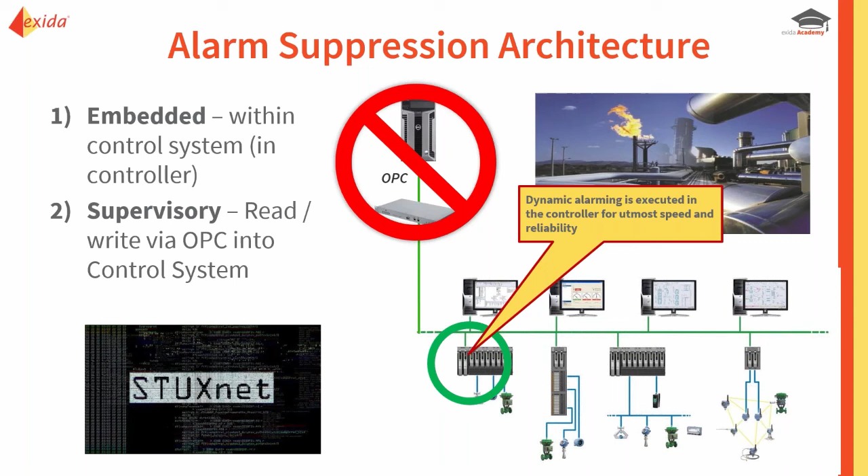Summarizing some of the main impacts of having alarm floods: if we are taking credit for alarms from a safety point of view, from a functional safety point of view, and we are having alarm floods, then we have to—or we should really assume—that it's not going to be likely that the operator will be able to respond reliably to prevent the consequence from occurring.

So if you're having alarm floods, you should not take credit for alarms for risk reduction. You should either redesign your risk reduction schemes or get rid of the alarm floods so that the alarm becomes a reliable entity. One thing that's sometimes challenging to understand is when we're analyzing these layers of protection...

If it's a hardware, mechanical, or electronic layer, we can relatively easily calculate the probability of failure on demand if we know the underlying failure mechanisms. And we can think that we can do that for an operator response. But the problem is operators are very different depending upon who they are and what's been going on, and the human factors element, the human side of it.

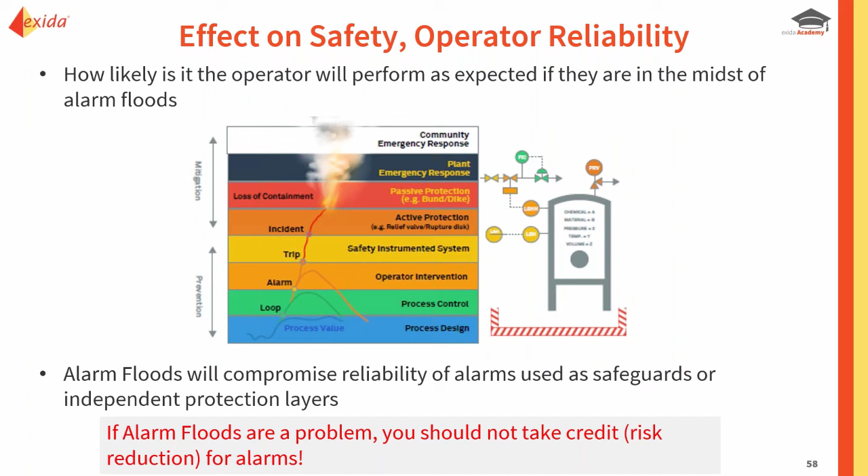So it's really difficult to do an accurate probability of failure on demand calculation for an operator unless you're considering the fact that their reliability is going to change potentially tremendously if they are getting floods of alarms. So that's why we recommend not taking credit for alarms if you have a prevalence of alarm floods.

So now getting to the end here and to the summary of the presentation, certainly we've talked about how alarm floods can cause significant problems, stress on the operators, lead to mistakes, lead to incidents, unplanned downtime, damage to equipment.

We also saw that addressing alarm floods is typically a different problem than addressing steady state alarm overload, which rationalization typically can address. Rationalization can help reduce alarm floods, but it may not be sufficient unto itself to totally eliminate them or get them to the point where you want them to be.

We saw how HMI design and alarm summary displays in particular can be set up to optimize the operator's response and make it as efficient as possible for them to be able to deal with the maximum number of alarms. We also talked about how to create an alarm flood suppression mechanism that would automatically detect the event occurring.

We defined detection logic, and then would suppress a group of alarms that you've predefined should be suppressed because they're not meaningful when that event occurs. And we saw how that's presented to the operator and what that looks like.